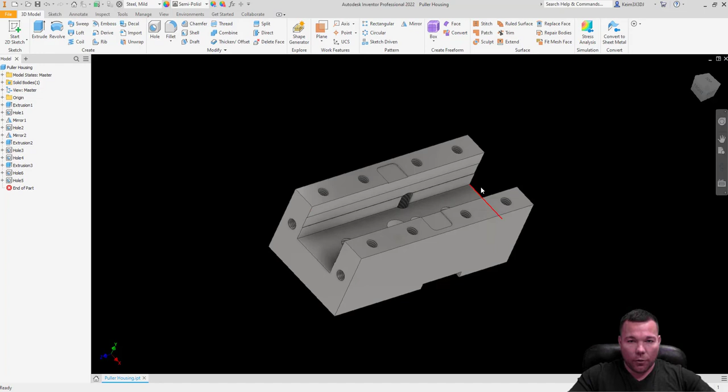But we're going to program this part here. Essentially what this is, it's a bar puller housing. Kind of give you a better idea, I actually have the solid here, so take a look at the solid. Essentially what we have is just basically a channel we're going to be making. We do have some slots down along the side, very shallow, just for some grease. Some tapped holes all around it, a little recess for a spring, some spring steel there.

Okay, so let's look at how we're going to process this part. That's the first step. Anytime you're programming something in 5-axis, you want to decide how you're going to process it. What's the most efficient way to process this thing? You have to think about the capabilities of the 5-axis, but also some of the drawbacks of the 5-axis. In this case, I think the best way here would be, well, number one, what stock do we have?

So for us, we have a bunch of 1 7/8 by 1 7/8 that was donated, so it makes sense, we're just going to use that stock. It's a little bit of extra material to mill off, but we're not making a ton of these, so we can use that stock. We're probably never going to use it for anything else.

So what it probably makes sense to do is to essentially hold by this face, so I'd be looking down on the part like this from my spindle. If I was viewing this from the point of view of the spindle, I'd be looking down on it. So what I would do is mill around and mill this whole part out, mill all the extra material around the sides of it, mill the slot, tap the holes, and we can actually tilt it in the 5-axis, drill and tap these holes, and essentially we have all 5 sides done, with the exception of only this 6th side, the bottom, where we can mill the extra material off and then finish this side as well.

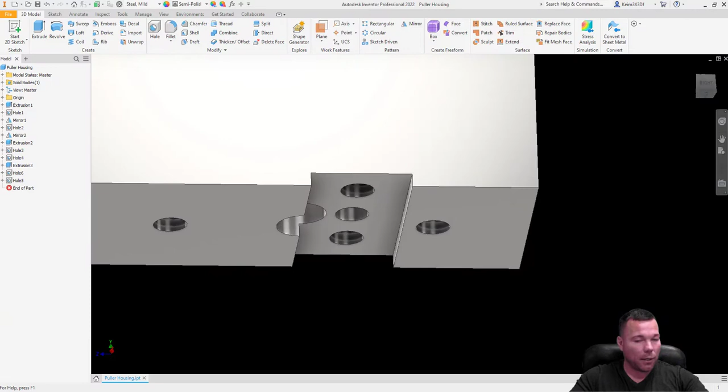Let's bring up MasterCAM. So I do have a solid, and I'm going to be working off of the solid. A lot of times I will work off solids for anything that I do in the 5-axis. Generally, I'm working off a solid. If I need geometry, I'll just create geometry from the solid.

So I'm going to go to Open and go to my computer, and try and find this. I don't have it up. So, Documents, and Bar Puller. I have to change my file type, so I'm just going to pick all files. And Bar Puller, we want the housing. Okay, and right here is my solid file. I just know it's my solid because I know what the icon looks like. The drawing file is actually this one here. So I'm going to pull that in, and of course it's going to bring that back up. Alright, okay, so I have my solid in.

Now the first thing I notice here is that my solid is not oriented correctly. I want that channel there facing up towards the z-axis. So I'm going to need to do a rotate here. I'm going to select this, and select rotate, and of course it's not going to give me the correct orientation.

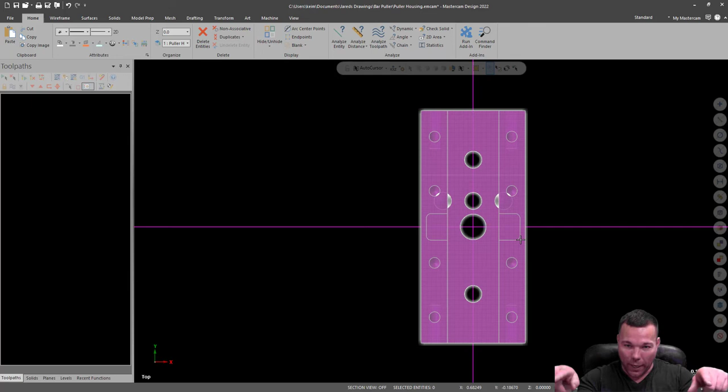Okay, so now if I go to top, alright, so now I'm holding it like this. Well, it's still rotated 90 out. I want it the long way, the long axis of the part to be aligned with the x-axis. So we're going to grab this again, and I'm going to do another rotate. It already knows because last time I did a 90, so I'm going to hit check. Alright, now it is aligned correctly, but I do have one other problem here.

You can clearly see that it is not in the correct spot on the Z. So what I'm going to do is click on this and dynamically translate this. I'm going to turn my 3D mode on down here so that I have all 3 axes. I'm just going to click anywhere, this doesn't really matter. I'm going to click the Z-axis, and align that to 0, or the origin. Alright, so now you can see the top of my part is at 0.

And the next thing I can begin to do is get my machine selected. So if I go to Mill, and I'm going to pick my 5-axis.

Okay, and I'm going to grab my stock, and we're going to set our stock up. So to do this stock, I know that it is going to be 1.875, and the Z is going to be 1.875, and my x-axis, if I look at my drawing here, is 3.375, so I'll probably cut that an extra 1/8 long. So we'll say that's 3.5 inches, 3.5. And I'll go ahead and hit check.

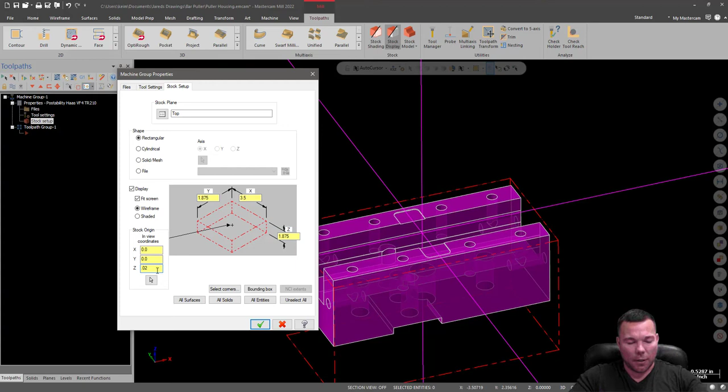So now if I look at this, there, it moved it up from the front. My stock should be slightly above the 0. So that looks good.

Now, to get this right, what I would do is when I touch off my G54 off the top of my stock, once I touch it off and zero it out, I'm going to put an offset of negative 20 in there. And then all my tools will be touched off 20 thousandths below the stock, right where my 0 is in MasterCAM. Your 0 in MasterCAM and your 0 at the machine have to be the same.

So this is G54 right here, or whatever work offset I decide to use. That has to be in the same spot in the machine as it is in MasterCAM. Okay, so starting out, I'm going to work on the top plane. So I'm going to hit equals, and we're going to go to the top, and we're going to take a face pass here. So I'm not going to select anything because I want it to face the stock.

I'm going to select a tool. Actually, before I do that, I want to turn something off. I'm going to go into Files, Tool Settings, and I'm going to turn off Assign Tool Numbers Sequentially. This is something that I traditionally have on because if I'm working in a VF2 or one of the other mills where we don't have dedicated tool assemblies in MasterCAM, I do generally want it to number my tools 1 through whatever.

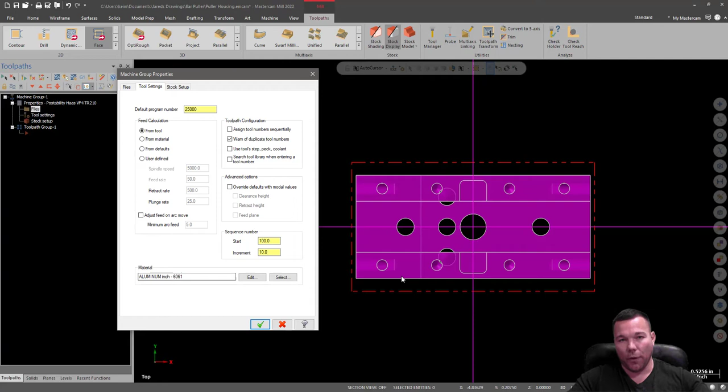But for this, I have set tools in my machine that stay in there pretty much all the time. So I want it to assign those exact numbers. So I'm turning that off. This material doesn't matter. My tools are set. It's set up so that it pulls my tool data right here from tool. So this material means nothing, essentially, for me because I have it set from tool.

Okay, so once this regens, there we go. So I'm going to pick face, and I'm not going to pick anything because I want to face the stock. Plus, I know that my cutter is 2.5 inches wide, so I'm going to be able to face this in one pass. All right, so select tool from library. I have to pull these over constantly because I have multiple screens.

And I'm going to pick my VF4SS tool crib. And I'm also going to open up my assemblies and turn my filter off because I don't have very many in there. And as you can see, I don't actually have my 2.5-inch mill in here. I know where I do have one though. Haas toolbox, and I believe, nope, I don't have it in there either. Okay, so I'm going to have to set one up.

So I'll go back to my other path, and I'm just going to create a tool, and we're going to pick a face mill. Okay. So I know that my face mill is a Haas face mill. So I'm going to go to Haas tooling. I'm actually going to get some of the dimensions for this. I know the cutting diameter is 2.5.

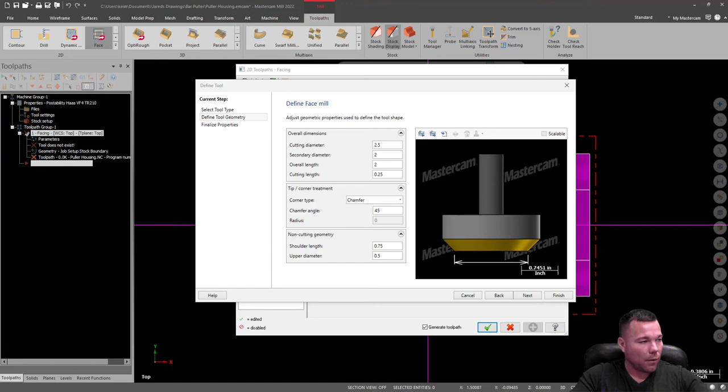And the secondary diameter, I'm going to have to figure that one out. Let's see here. Bring this over. Okay, so we want to do milling. Shell mill bodies. And this is my type, HSNP. I need a 2.5. That's this one. Okay, so the cutting diameter of 2.5, 3.102 is our max diameter, so that's this outside. So we can now set that for our secondary diameter.

So it's 3.1? Yeah, 3.102. All right, overall length. I'm going to take a shot in the dark, 1.75 there. Okay. Cutting length, we have a 0.275. Okay.

All right, and then let's see here, upper diameter. We're essentially going to make that just a little bit smaller. I don't know what that is. It doesn't actually have a dimension on our model here on the Haas website. So I'm just going to say that's 2 inches because it really doesn't matter. I'm not cutting with that, so it's not a big deal.

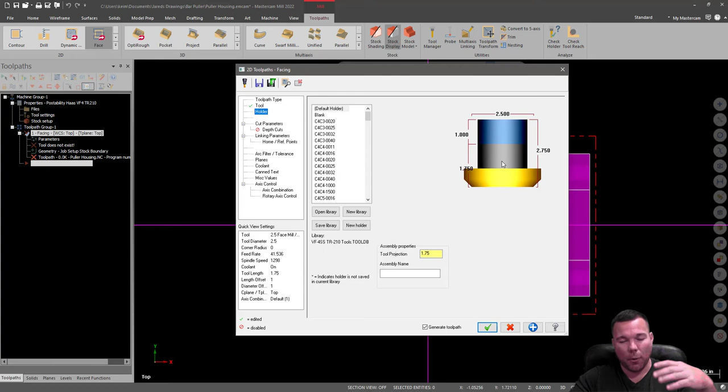Cutting parameters. Now, I'm not going to pay attention much to my holder here because my holder is really not that relevant. Basically, because my holder diameter is actually smaller than my maximum cutter diameter. And I don't foresee any issues where I'm going to have any problems. I'm only going to be doing 3+2, and I'm not using this cutter on any other sides. I'm not doing any 5-axis linking. So I'm not going to have to worry about my cutter colliding really here, or my holder colliding. So I'm not going to set that up. I'm going to leave that as it is.

Let's see here. Okay, so we're going to do a one-way pass. Oh, check that. One pass, I mean. And entry approach 50%. That looks good. Depth cuts, we're not going to take depth cuts because we're only taking 20 thou off. Depth is going to be at 0. Top of stock is 20 thousandths above. Feed plane, all this stuff looks good.

Planes are on top. I'm going to make a manual work offset here because with these 5-axis posts, every new plane that you create toolpaths on will create a new fixture offset. So this one would be 54, the next one would be 55. You can override that here by selecting manual and making this a 0. It'll use 54. If I wanted to use 55 for all of them, I would make this a 1, and so on. 56 would be 2. So you want to make sure that you manually override all these work offsets to the same value. That's pretty important.

And it's going to ask you here if you want to update that for all operations on that plane. And the answer is yes, I do. Flood coolant is on, that's good. And it should have created a path for us, and it did. You can see there, if I actually turn off my axes, you can see our toolpath. All right. So that looks good.

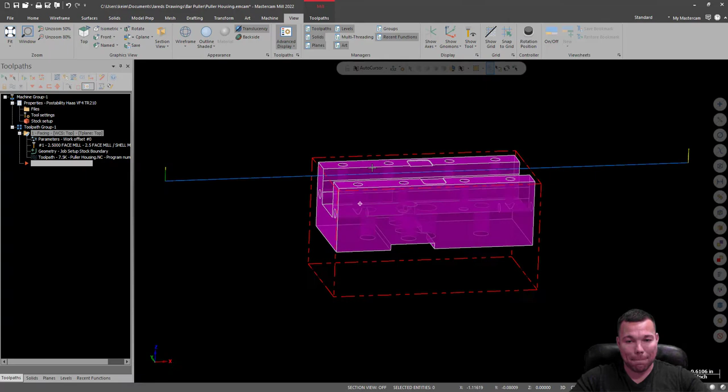That's facing our part. Next thing we're going to do is we're going to want to mill around this part. Now it's 1.5 inches deep. I know that I have 1.5 inches length of cut end mills, so that's what we're going to use to cut around this part. Alrighty, let's go to toolpaths, and we're going to go to, actually, check that, not contour. Nope. We're going to go to dynamic, and we're going to dynamically mill this.

Machining regions, we want to mill our stock away, so we're not going to select a region because it's just going to select the stock as the region in that case. We're going to start from the outside because we're not doing a pocket, we're doing a boss. And the avoidance region, well, that's going to be my part. So this is an interesting problem here. So now I need to essentially create an avoidance region all around this part. So let's say I create multiple regions here, and let's give that a shot and see what we get. Check. So I selected all the sides.

I'm going to pull a tool from the library. In this case, I want my 1/2 inch end mill steel. I do need to edit this because I know that this tool is only 1.25 inches length of cut, and I want it to be 1.5 inches. Shoulder length, 0.5, we'll make this 625. Okay, that looks good. Finish.

I'm going to adjust the... Okay, so that's actually fine. It's already sticking out enough. So we're good there. It'll actually probably be sticking out further in real life. As long as we're sticking out at least that much, we should be fine. The importance of having this holder is to make sure there's no collisions. I'm only going down 1.5 inches, so I shouldn't have any collisions with this. Once we add our fixture later, that's where you'll kind of see this come into play, this tool holder.

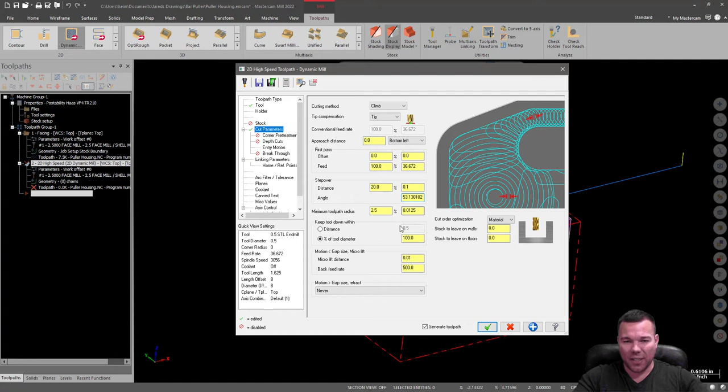Keep that tool down within. Essentially what this is doing is making sure that it's keeping the tool down, and it's going to use a fast feed rate to return to the next cut location, unless it exceeds 100% tool diameter. So in this case, it would be 1/2 inch. I want to increase that. I'm going to make it 2.5 inches by saying 500% of tool diameter.

The back feed rate, we're going to make that 800. Oh, okay, I'm limited here. I'm limited to 500. I have to change that in my machine definition, but we'll forgo that for now. 0.01. I'm going to leave some material on the walls so that we can do a finish pass.

And when avoiding a boundary or exceeding a distance. So this essentially is just this motion. It's going to come up and wrap it over when it exceeds 500% of the cutter, the distance that it has to travel, or if it's avoiding a boundary. So that's what I'm setting there. Corner pre-treatment, I'm not going to use that. We don't need that for us. I'm only taking 100 thousandths passes, so it should be fine taking those corners.

We're going to plunge because we are coming down off of the part into air. And our depth, we know that that is -1.5, and I'm actually going to take that 30 thou deeper. I actually have a little extra on my end mill. I know that I do, so I'm okay going an extra 30 thou there. Top of stock is 0, feed plane 1, we're good. 0.1, I mean, 0.25, that's all good.

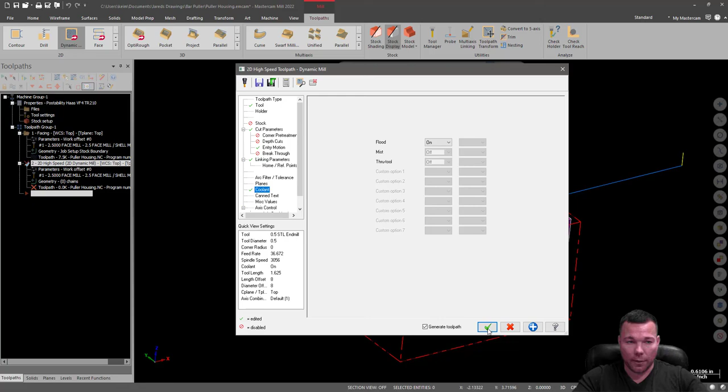And hit check. Okay, so you can see here, it's coming down, it's milling, and you can see my rapid moves so that it repositions itself rather than rapids or fast feed rates all the way around the part. So this is actually a really good example of where you want it to have that exceeding a boundary or a distance. Okay. So that looks pretty good. Next, I am going to do a contour.

All right, so this contour, even though the dynamic mill worked, the contour is going to be problematic. So generally, it does not like when you pick faces like this, and we'll see how this goes. So, I don't think I set these properly. My speed for that end mill is 600 surface footage and 3 thou. I'm going to slow this down for this finish pass to 30 inches a minute. And my plunge rate, I'll make that 40 inches a minute, and rapid retract.

You can see it's a contour 3D is the type. So what it's going to try and do, it's going to try and do this right here. Anywhere there is a gap down there, I want to switch that to 2D, and let's see what happens here. It's not going to like it. Stock to leave on the walls, nothing. Maximum depth variance is fine. Oh, we do want to round the corners, so external corner breaks. Let's put, actually, let's check our...

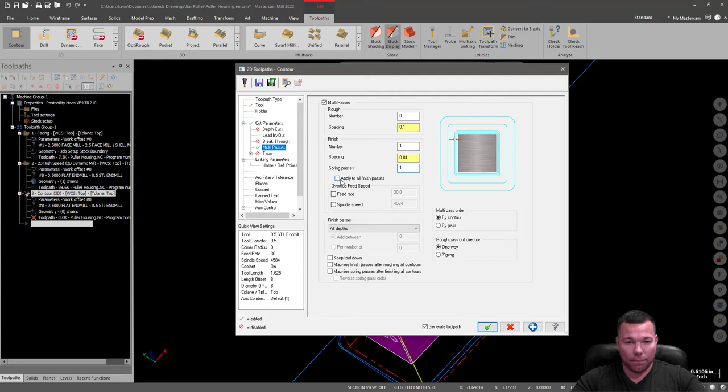Multi-passes, I am going to turn multi-passes on. I'm going to turn rough off. Have one finish pass at 0.01. And I'm going to add a spring pass to make sure that it mills off any extra material that was left on from deflection. And that looks good. Linking is negative 1.53. Top of stock is 0 in this case because we've already milled it off. And coolant is good. Okay.

Okay. So probably shouldn't have went through all those parameters, but I knew that wasn't going to happen because it doesn't know. I just picked a bunch of faces. So I knew that wasn't going to work. So the best thing you can do is we can actually leave this and we can reselect a chain here.

And to reselect that chain, the easiest way to get this is probably just to create a level. And I always create levels for, and I'm going to say top geo, so it's my top geometry. And essentially I'm just going to draw a rectangle from here to here. And hit check.

Oh, it drew at the bottom. Shucks. All right, let's undo that. So sometimes I can't see where I'm snapping to. So it snapped to the bottom rather than the top like I wanted. So to prevent that from happening, what you can do is just turn on your 2D setting, and now it will always draw geometry on 0, basically at your Z0.

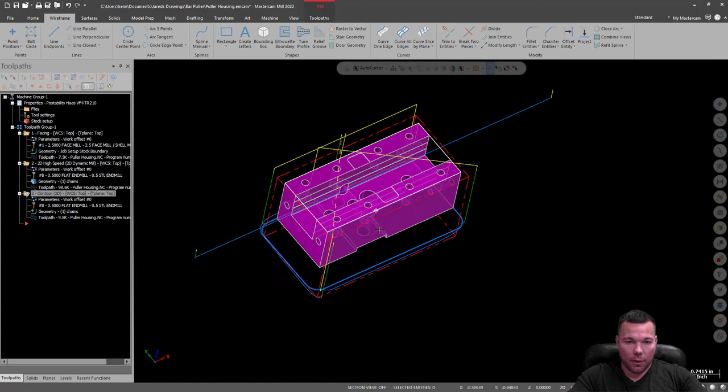And I'm going to go in and make sure that I have my cutter comp off to the left. I do. So everything should be good there. All right, and there it has now redone our contour. Okay, so everything looks good. All right, let's verify that and see how that looks. All right, so that looks good. It is putting a small radius on there, the 20 thou that we asked for.

All right, so I'm going to turn these off. And next, well, I guess we might as well mill out this slot. Now, you might be wondering, okay, well, can we drill and tap these holes first? Well, the answer is yes, we can. But what I'm thinking here is when I go and I remove this material, I'm worried that this is going to move a little bit, which will change the location of my holes if they're drilled prior to that.

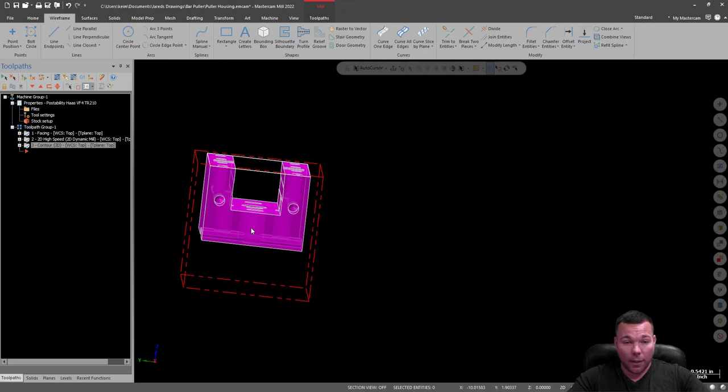This isn't a huge concern of mine. The outside is not a critical dimension whatsoever. It's plus or minus 5 thou, and it could be plus or minus 20 thou. Not a critical dimension. That is one of the advantages of actually engineering the part or creating the part yourself. You can control what is important, and you know what is important and what is not. What is important is the dimension between here. So we are going to peel mill this out.

And these hole dimensions are actually pretty critical too. But the outside dimension, not critical. So if that thing does spring in a little bit, I don't care about the outside dimension. I'm worried about the dimension of that channel, and I'm also worried about the hole dimensions from hole to hole. So I'm going to wait until I mill the channel out to drill those holes so that they are actually on location. That way, if this material relieves itself a little bit, the holes don't move in with it. They'll be drilled in position.

If I did care about the outside, I would actually probably mill and leave maybe 10, 15 thou, maybe even 20 thou on the outside, and I would do my finish pass for that after I took most of the material out of the channel. That way it would relieve itself, and I could, again, make sure that that part was getting milled square. But it doesn't matter in this case, so I'm not going to worry about that.

I'm actually thinking about it, and I'm going to say, well, you know what, let's do it that way. It ain't going to hurt anything. It's not going to cost us any more time. So I am actually going to insert my peel mill before I do that finish contour around the outside. Okay, so toolpaths, let's pick our peel mill here. And again, I may have some issues. Actually, I won't. I could pick these lines here. So basically, I just need a straight line all the way down the part to pick for this peel mill.

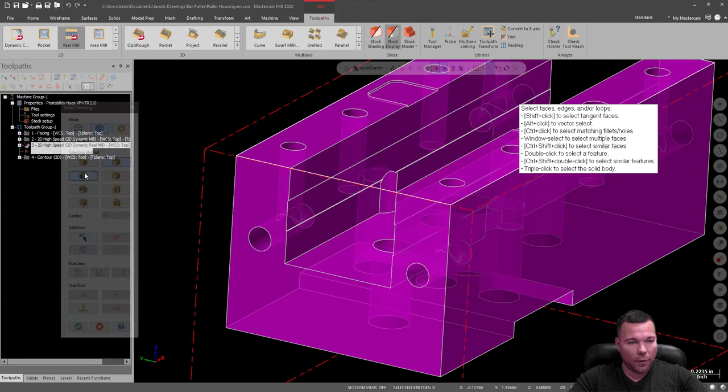So if I select that line, end, and that line. Check. Tool. I'm obviously using the same tool. Again, this is going to be 600 inches a minute. And I do usually have these tools set up for the correct speed, but I'm actually using a different brand tool. I probably should create a new one so that I have it in there.

3000 fine, plunge rate at 40 inches a minute because I'm not coming down into the material. Let's see here. Step over distance, we're going to do 20% again. Climb milling. Toolpath radius is important for this. 500 back feed rate's fine. No material left on the walls.

Additional entry and exit, don't need that. I think everything in there is good. We don't want any depth cuts. We do want some finish passes here, so I'm going to leave 10 on. And then I'm also going to take a spring pass at the end, and I'm going to override the feed rate for that too, to 30 inches a minute. And that should be pretty good. We have our wear on so that we can adjust it if need be.

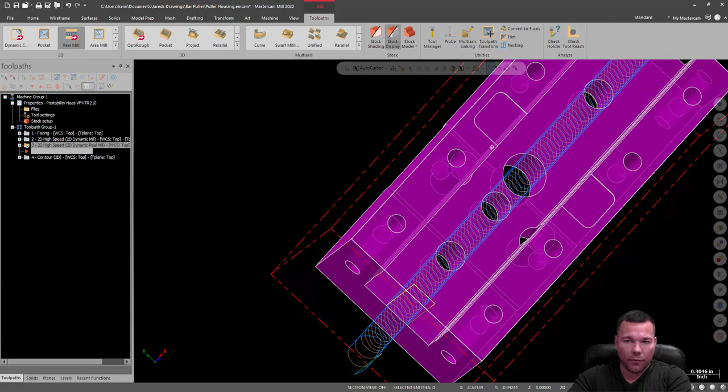One thing I can see here is that it's starting our finish pass right on the edge. So we want to change that a little bit. I'm not real wild about that. We need to put a lead in and lead out on there. And let's regen that.

All right, so that's a little crazy to lead in and lead out there. So let's get back. I didn't actually look at that. 10, 10. All right, let's see what that looks like. Let's preview it. I'm going to use this little button right here to preview what it looks like. Okay, so notice it's leading in. Problem there is that it's still starting right now. I actually want to extend that a little bit.

So what I'm going to do is adjust contour, and I'm going to extend it maybe 0.1. Check. And now you can see that it's starting out a straight line a little bit before. Now, the one thing it doesn't do is, when it shows your lead-in lines, that's part of your lead-in, so that's not going to be in blue, it's going to be in green. The key is just making sure that there's a straight line there as opposed to just an arc that's tangent to that point.

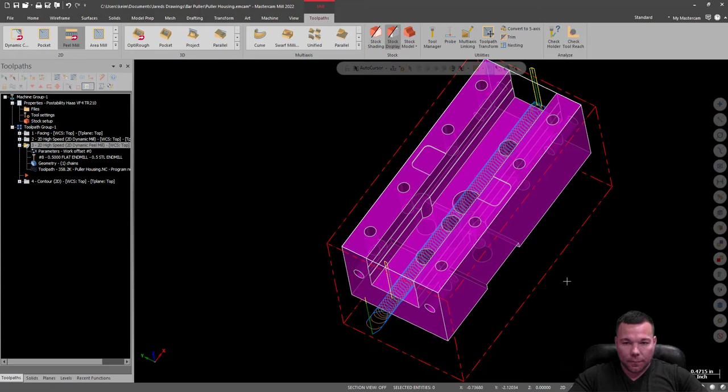And I do want to double check that actually, because I'm not convinced that it is. Ah, it didn't save it. 0.1. That's better. Okay, there we go. Yeah, wasn't quite convinced. Now you can clearly see that it added that extension. All right. So we have that. I'm going to turn that off, and let's see what this looks like when we run it. Okay, everything looks pretty good there.

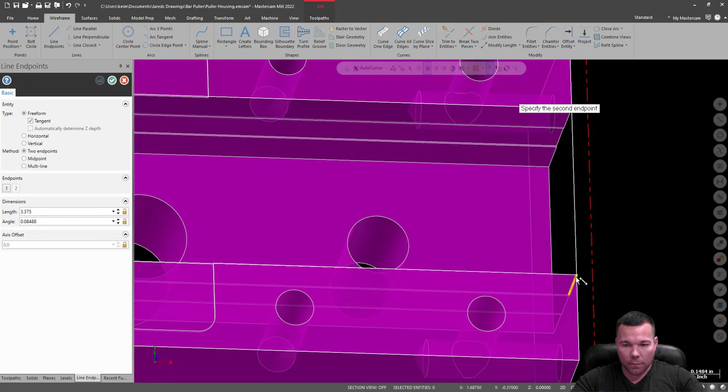Now we do probably want to add a small chamfer to here. So let's go back and add that in. So to do that, we're going to have to create some geometry. So let's go to top, and I think I'm still on top geometry. I am. All right. Oops. Wireframe. And the goal here is just to create geometry so that, that's interesting. That wasn't snapped correctly. All right.

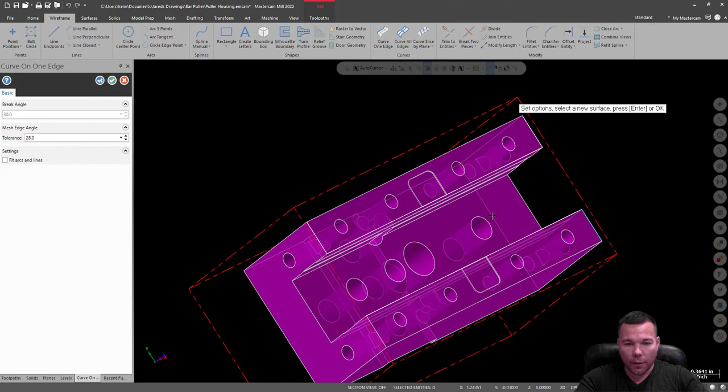I've actually changed my mind here. I'm going to put this on a different one so I don't mess up my... turn that one off. Okay, and I'm just going to turn that into geometry, that, and that. And then we're going to add a chamfer. So I'm just going to make it 0.02, just in keeping with the other radii that we have. All right, check.

Okay, so I'm going to turn this off, and it was supposed to trim that, but for some reason it did not. Yeah, I had trim entities clicked on. Whatever, I can trim them. So this seems a bit tedious, but really the idea here is that you want to make sure this part comes off completely deburred. No reason to spend time deburring something, especially when you're doing it in the 5-axis. It should come off complete, so you don't have to touch it.

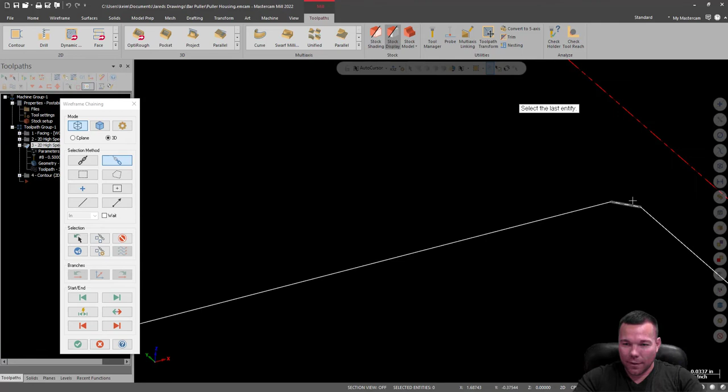Okay, so where am I going here? I lost my train of thought. Yes, I already have this. So go back in. If I can slide over, there we go. Go to my peel mill. Gonna repick, rechain all. And I'm going to pick a partial. Select there. There. There. And, oh, I spazzed out. Clicked the wrong thing. Okay, check. Check.

Let's see if we can regen that. Hopefully that regens. No operations were selected for regen. Okay, there we go. We did regen it. That one, Alt-T. Alright, so there is our path. And now you can see our chamfer has been added there. Okay, so let's see what that looks like when we play it.

Now you can see our chamfer. And there we go. Alright, so that looks pretty good.

Next thing I'm going to do, I might as well stick with the chamfers. So I'm going to come back to my solid and X out of there. We're going to go around all of these profiles on the top. Actually, I rethought that. We're going to wait to do our chamfers, so we can chamfer everything at once. After rethinking about that, it doesn't make sense to do it now.

Next thing I'm going to do is mill these slots out. So we'll dynamically mill those, starting from outside again. Our machining regions are going to be right there and right there. Check. And we have some air regions here. If I select that end and select that end, check.

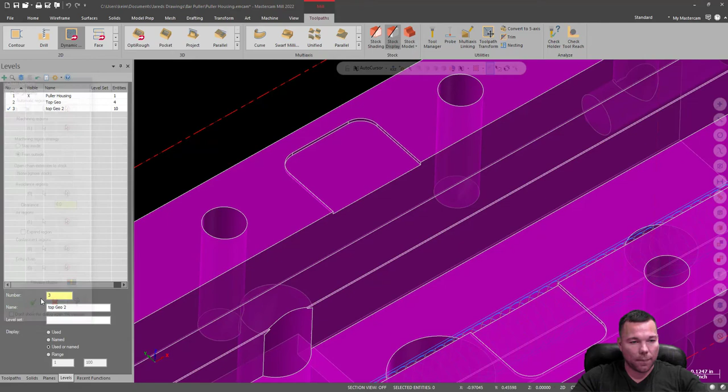Tool. I'm not sure what that radius is in there, so I'm just going to pick a tool and come back and change it if I need to. Hopefully I can get in there with a 1/4 inch end mill. Hoping that's an 1/8 inch radius. But we'll see what happens here.

So all those speeds and feeds are right because they're set up correctly. I know that that's right. Let's see, step over distance. We'll do 25 for this since we're not cutting much material. Stock to leave on walls, 10 thou's fine. All this stuff looks good.

Depth cuts. Depth cuts looks good. We don't want to do anything there. Plunge only. Depth, we're going to select the bottom of that. And top of stock's going to be 0. Planes, everything else looks good.

Alright, so you can see there, it comes in and mills that out. Let's see if I got my end mill right here. Analyze entity. And the radius is 70 thou. Perfect. Oh no, that's actually not perfect. Shoot.

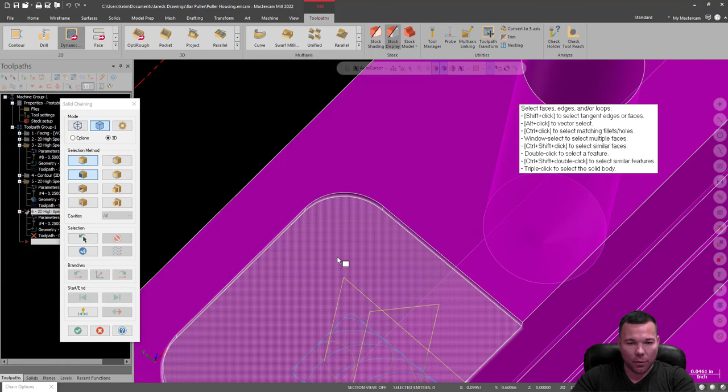So we'll come back in and do a rest mill. Come back into our tool paths, pick another dynamic path, and same thing, same machining region. Oops. Same machining region there. Oh, darn it, unselect. And check. Air read. Oop, not avoidance. Escape out of there. Air regions. Okay.

Alright, so we'll pull up a tool, our 1/8 inch end mill. Everything looks good there. Cut parameters. We want to do a rest material, one other operation, which is going to be this one. Yes. Okay, everything there looks good. It's entry motion. This is 0. Check. Alright, so you can see there it's cleaning out that corner.

And then what I'm going to do is just use my contour to finish that. So I want to make sure that I'm climb milling in this case. We're going to do a partial. Check. 1/8 inch end mill. That plunge rate is way too slow.

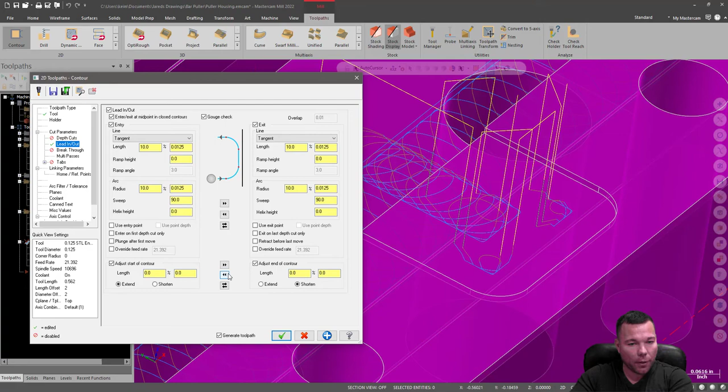Wears on 2D. This here is all pretty good. I just want to make sure that I extend this a little bit, so extend this 0.02. Multi-passes, I'm doing a finish and a spring. That should be fine. I probably could get away without even doing a spring there, but let's leave it in there just in case. 0. And that looks good. Okay, so there we go.

One thing I want to do is go back and look at my dynamic peel. I'm actually going to put a depth cut in here, a finish step of 10 thou, mainly just because I want to hold that depth pretty accurately. I still want a nice finish on that floor. So I decided to change that. So we're going to hit check for that.

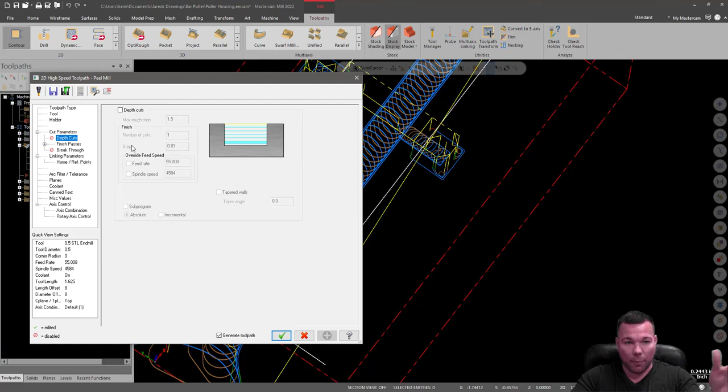Alright, so it added a finish pass at that depth. A lot of times what I'll do there, actually, rather than use that, is create another path, and I think that's what I'm going to do. I don't want to step over 100 thou if I'm only taking 10 thou off the bottom. I want to step over a lot more than that. And I don't have that option to change my step over just for that finish pass. So since I don't have that option, I'm actually going to just create another peel mill pass there.

You know, one of the things you may have noticed is I'm kind of indecisive when I make these videos, and that's because I'm thinking through it in process, right? I don't have this rehearsed or anything like that. I'm thinking through it, seeing what's happening, and thinking, okay, well, I don't quite like that, you know? So I'm going through it, changing things as I go, which is realistic to what you'll be doing. So that's kind of why I like to do it that way.

So this looks good. All my speeds and feeds are good. One thing I didn't see, that's 40, that's good. This here, the step over, we're going to make this like 75% of cutter. We're only taking 10 thou off the floor, so we're not worried about that.

Finish pass. Let's see here. We do want to take a finish pass here. So that's where we're going to take our finish pass.

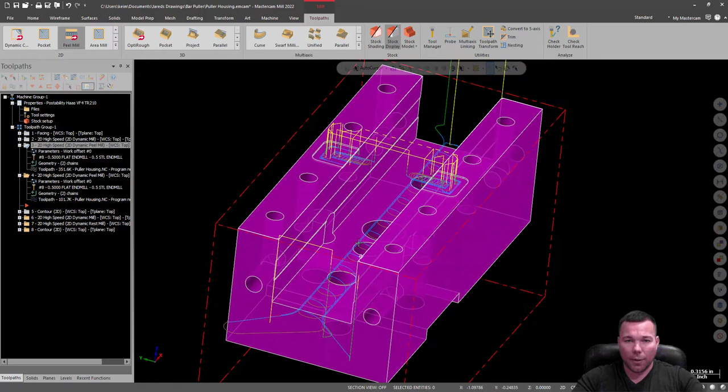Depth. Well, it helps if I have the level on so that I can select that. Okay, 0, and everything else there looks good. I just got to go adjust my other one. Okay, so that looks great. Let me turn this one off. Yeah, so you can see the amount that it steps over. There's much shorter toolpath for sure.

So that looks good. I do want to adjust this. I can turn off this finish pass. I don't need that anymore because I'm doing it in the last one. And I also need to leave some material on the walls, 0.01, and I need to leave some on the floors, 0.01, for that next operation to take off. Okay, so I think we're good now. I think I can live with that.

So let's take a look and see what we got here. That looks a little interesting.

I wonder if that's just graphics. It appears to be just graphics. The way I can tell is I can see my toolpath here. My toolpath looks straight, so I don't see any issues there. That's something I'll keep an eye on when the first part comes off, though. I'll make a mental note that something like that didn't quite look right in graphics, so it's one of the first things I'll look at when that first part comes off. I'll double check and see if that looks like it's gouging in them corners or not. But I don't think it is. I think that's just a graphics issue.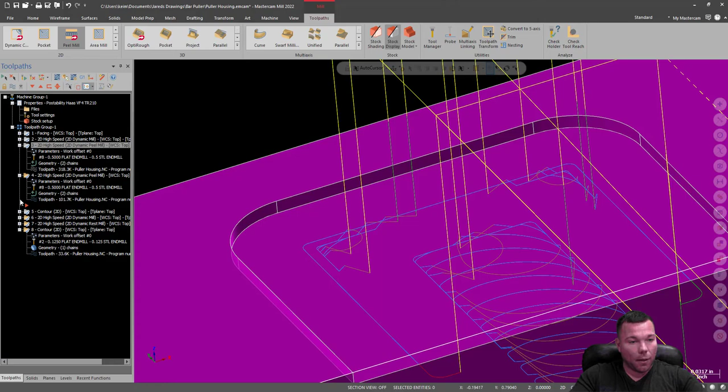Okay, so let me turn all of these off so they're not in my way. All right, so we have a couple more things we can do on this face. We can drill these holes. Again, I'm going to wait till last to do that, or almost last. The other thing that I can do here is put this little slot in.

That little slot is going to be done with a woodruff cutter that I have here. It's telling me that the slot is 200 wide. This woodruff cutter is 3/16. 200 wide plus or minus 64, so it does actually fall within tolerance.

The other thing is I know what this is for. I just arbitrarily drew it to 200 thousandths wide. Probably should have just drew it at 3/16. At the time I wasn't sure what cutter I had, but I figured I had something around 3/16. So I don't really care if it's wider or narrower. It doesn't really matter, it's just for grease to pass through. It's only 10 thousandths deep.

Now, ideally, a woodruff cutter wouldn't be used for this. We would use a T-slot cutter because they have relief on the flutes. But it's not uncommon in industry to use what you have. We do not have a T-slot cutter, we do have a woodruff cutter, and this will work for what we're doing here. Plus, we're not taking it real deep, we're only taking 10 thou, so I'm not really worried about chips binding up. So this will work just fine.

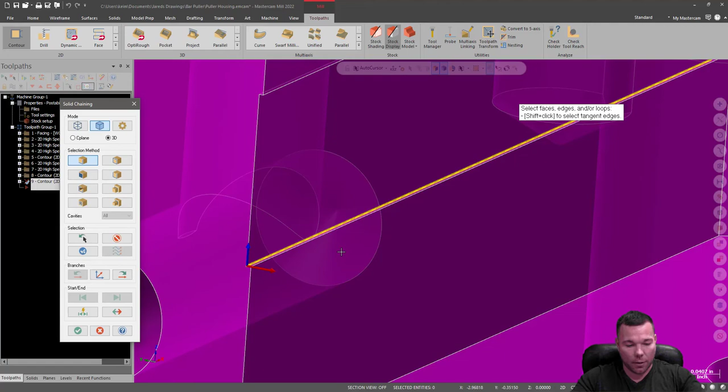And I'm going to select a single... well, actually, I'm going to go into my solids and select a single edge. And I'm going to select this edge. And I do want to think about this, and that actually is the wrong direction, so I want to reverse that. And I'm going to hit end. Okay, so right here I can already see I have a problem because that hole intersects it. I can't pick that whole line. Alright, so that's out, I'm going to pick no there.

Other things I can do: I can draw a line there, which is probably what I'll end up doing. But I could also use this top line as well and just add to my depth. Right? It doesn't really matter what line it is, that's just the path, it doesn't necessarily define my depth. So that's actually what I'm going to do.

Spin this thing around. And I'm going to select this line that is at the correct location. And note that it goes the whole way through. And going to select that line.

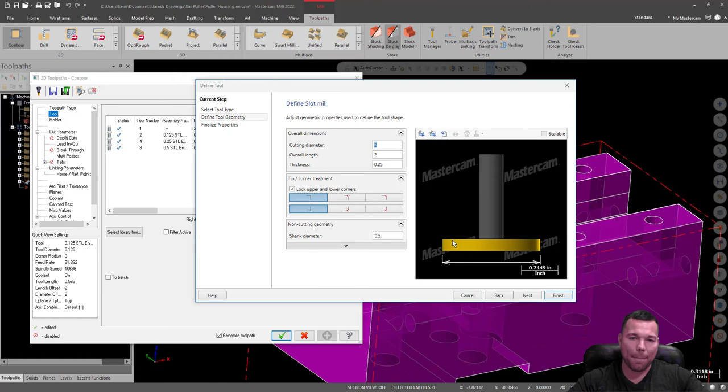Grab my calipers out of the drawer here, and I'm going to measure this diameter of this cutter. It looks like I'm getting about...

0.845, so 0.845 will be our diameter. Our overall length, sure, we'll try and get it as accurate as we can, I guess - 2.2. Thickness, that I know is 0.1875. Upper and lower corners, they are square on this part. Shank diameter - oh, helps if I put the right thickness in. Shank diameter is indeed, I believe, 1/2 inch. It is, okay, so that all looks good.

Shoulder length, there really is no shoulder length here. You can tell there's a little inset because it's a woodruff cutter. It's generally what tells you the depth of how deep to plunge the woodruff cutter in. Doesn't matter - as long as I have my maximum diameter here, I'm not going to exceed that anyway, so I know I'm in good shape. I'm not really worried about the shoulder length either, it's pretty much pointless. I'm going to make it 0.2 just because it bothers me seeing that different color there.

Finish. Okay, so we got our slotting mill, and I'm going to create a holder for this. I'm going to go to Open Library, and I'm going to go to my CAT 40-inch, CT 40-inch, open that up. And these numbers, these 0, 20, that is your collet size - so ER32, or sorry, ER20, ER25, 32. So that looks just like one of our ER32 holders, I believe that's what I'm going to be using. Yeah, I think I'm going to use that.

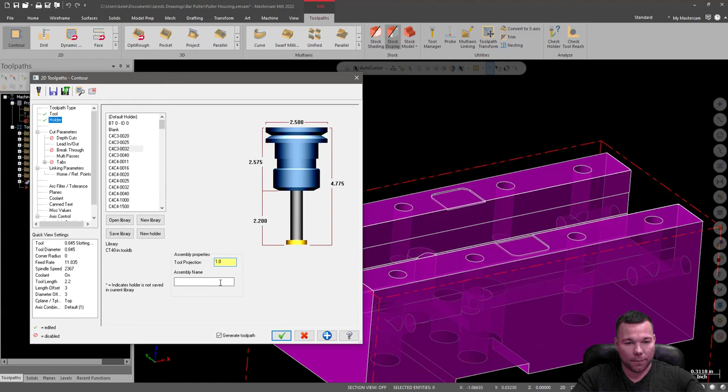So tool projection, we'll say this thing's going to be sticking out maybe 1 inch. That should be fine. If I need to move it up, or move it down, I mean, everything looks good there.

We're going to put wear on. Compensation's off to the left - that's good because we're climb milling. Break external doesn't mean anything here, we don't have any external corners. We do have a lead-in extension, that is just fine.

Breakthrough multi-passes - I am not even going to leave multi-passes on here, I'm going to do one pass. I don't care about the surface finish in this thing, it's not functional other than just to leave space for grease to access the back of it.

Depth - the depth of this is going to be at that location. 0 is my top of stock. And planes, coolant's on. Check.

Okay, so if I hit Alt-T, I should - oh yeah, there they are. So you can just barely see them over this, but that right there is my path. All right, so let's go ahead.

One thing I did notice - oh, so we're gonna have a problem here. One thing I just noticed when I was looking at this is that the start for this side is past the other side, which means that my cutter is wider than my slot, which I didn't notice originally. So that means I'm not going to be able to use this cutter, I'm going to have to find a different cutter.

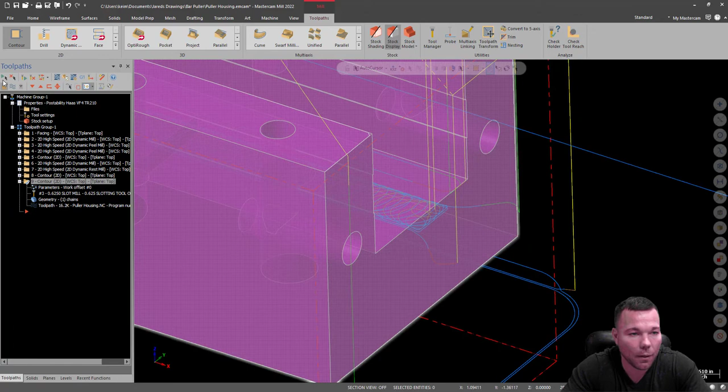Alright, so let's see what it looks like when we play it. See if we get our groove. There we are, so we have our slot groove in there, and that looks good. And by the way, any kind of see like a wave right there along that line, that's just graphics again. I'm not sure why it does that, but it always does that on chamfers.

All right, so let's X out of there. All that stuff looks good. Turn all those tool paths off. Okay, so we have essentially all our milling done from this perspective. The only thing that we do need to drill yet is this - it's the last hole that I'm going to drill from there, or well, I guess it's not the last hole because I got to do these two.

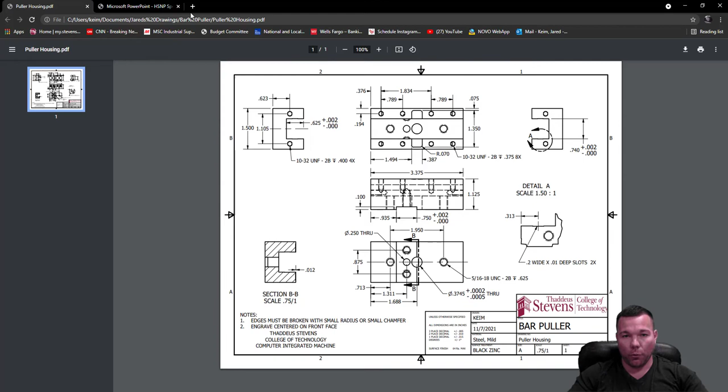All right, so let's drill those holes. Or drill this hole, I should say. So we're going to pick drill, select that hole, check. And I am not sure what size that is. I have to take a look. It is a 3745. Okay, so let's go grab a drill from our library here. And I don't have anything that really works too well. That's really pushing it to run a reamer through, so I need something closer than that. Ideally, I want something that's about a 64th under. It's close to 3/8, so 64th, maybe a little extra would be okay. But essentially, I want to stay around a 64th.

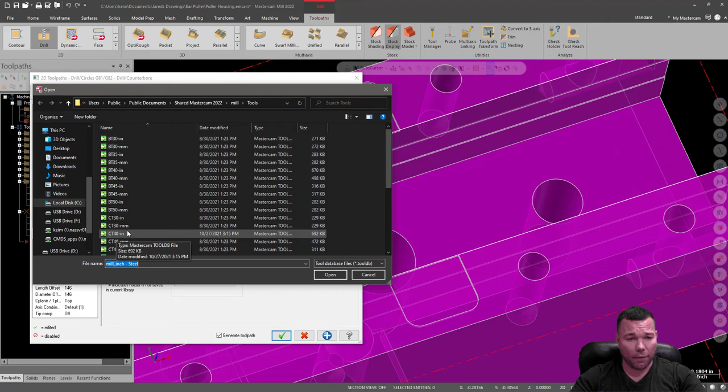So I'm going to come down to my steel inch, and that's going to give me a crazy amount of drills as soon as I get off assemblies. Okay, so there's our 375. Right here is our 2364. So that's what we're going to use. So I'm going to select that 2364, drill that at 5 inches a minute. Speed's right. Holder, let's open up our library here. And again, I'm picking this holder because I don't want collisions. Anytime I do something in the 5-axis, even though I probably would be fine because I'm only using this for that hole that's going to essentially be a 3-axis move. I'm basically milling it like a normal 3-axis part. But just abundance of caution, I like to make sure that it's...

So I'm actually going to edit this tool. Edit tool. Overall length is 3 inches. Cutting length is, let's say 1.5. I'm going to say this is 2. And we're going to say this thing's sticking out, I don't even want to say that much. I'm going to say 1.65. And that looks pretty good. So I'm going to hit finish. And I'm going to have this 1.75. And we are just going to drill this. We're not going to peck drill or anything like that because we're not going that deep. So I'm going to come down. My depth. Zero. And I want tip comp on. Breakthrough amount extra 10. Make that 0.05.

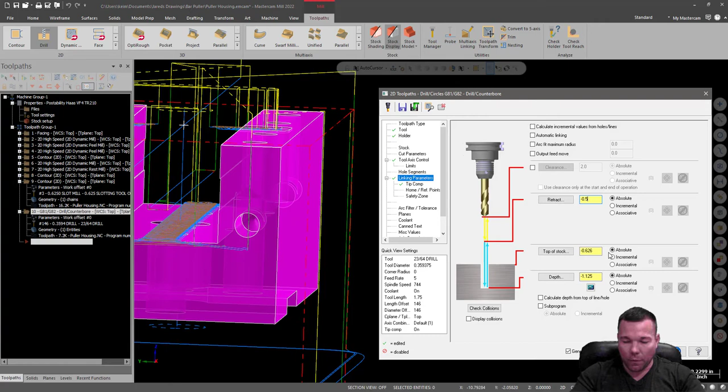Preview that toolpath. Okay, so when you look at this, you can see it's drilling down through. That's good. But if you take a look where it's starting, I don't want to drill a bunch of air. So what I can do to fix that is I can go top of stock and I can choose the hole. And I can also go retract and I can choose the hole as well. And I can just reduce this. Maybe I'll make that negative 0.5 and hit check. Alt-T. One of my big gripes is that sometimes this Alt-T doesn't work as well as I'd like it to.

The other thing I noticed is that I'm way too deep on my... I don't know where I got 1.5 at, but I can adjust that. So I'm not seeing... There we go. All right, so now it's going to start drilling right there. So rapid down to there and then drill. All right, so that looks good. Let me adjust these contours. I got the 1.5 from the wrong dimension. So I want to adjust this. Linking parameters, negative 1 point... in this case, we'll make it 2, because 1.125. Check, and that finish contour, which is right here. Negative 1.2.

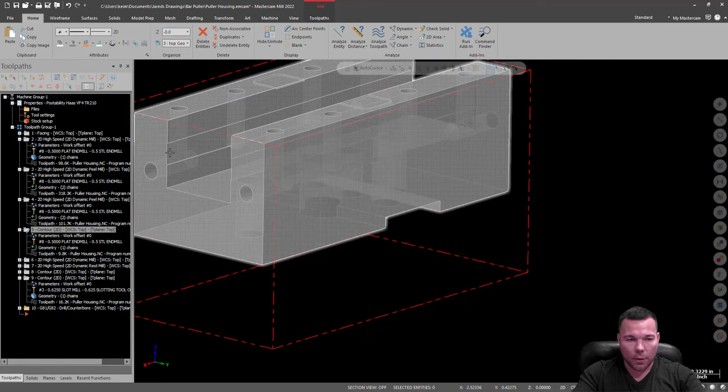All right, so we've got our drill, and I'm using a split point drill, so I'm not going to spot drill that. Next, I'm going to drill this again, and I'm essentially going to do the same thing, only I'm going to use a reamer this time. So I'm going to select and filter. I'm going to pick a reamer, check, and we're going to just pick 3/8 reamer. In reality, it's not going to be a 3/8 reamer.

0.374 reamer. Finish. And the only reason I changed that name is just so I can see that when I print out my tool list. I don't accidentally, even though I should know, it's very easy to make that mistake when you're in the moment and you just grab a tool.

So open library, CT40, and we're going to use our 32. It's definitely going to be sticking out at least 3 inches, but that'll be fine. I'm just going to leave it at that because I'm not worried about that one hitting. Tool, we're going to run this at 35 surface feet, and the feed rate we're going to run at about 12 inches a minute. Okay, so there we go. Remember, half the speed, double the feed. That looks good. That's for a reamer, obviously.

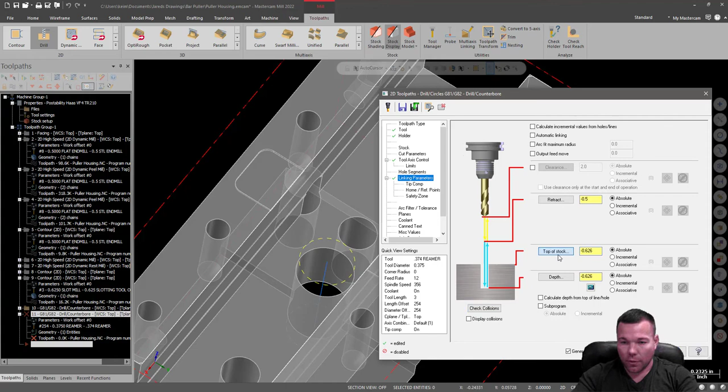This is negative 0.626. Depth, bottom of that hole. Tip comp is on with 50 thousandths of breakthrough. That looks good. Okay, so there we go. Actually, I want to take 0.025 breakthrough. Actually, I'll make it 30. I don't want to hit the bottom of that hole. So I'll hit check. There we go.

Picked the wrong one. Depth. There. Check. There we go. Okay, so that looks pretty good. All right, next thing I'm going to do is the holes. So I'm going to grab those holes. So we'll just start here, and these are getting tapped. So I'm going to select.

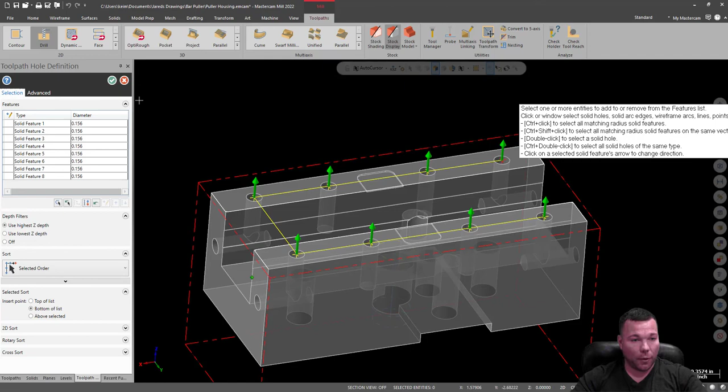So there is a way that I can drill all of these holes all at once, even the ones on the side. I don't like it. Sometimes it works, sometimes it's very finicky. So to use that multi-axis drill path, not a big fan. So I'm going to go ahead and hit check, and I'm just going to create these on different planes, and then I'm going to use my multi-axis linking to link all of those tool paths. That tends to be a little bit more robust and create a better result than what you normally would get with the 5-axis drill.

Tool. Okay, so these are 10-32s. So if I'm not mistaken, I believe that is a number 25 drill. Those drills, number 25. This is assuming that I'm using a cutting tap and I'm not using a thread forming tap, obviously. If I'm using a thread forming tap, it would be a bit different.

Okay, that looks good. And you'll note that I'm not worried about these tool numbers right now. I'll go change those later. Not a big concern. It's just getting the ones right that I know that are in there. I'll change all of the new tools that I've created.

Okay, so this length is definitely a problem. Definitely got to change that up. Overall length of this is going to be about 2.5 inches, maybe. It might only be even 2. Cutting length, we're going to say it's 1.0, and we're going to say 1.5 is the shoulder length. And then finish. And actually, that's too much as well. I changed my mind on that. Finish. All right.

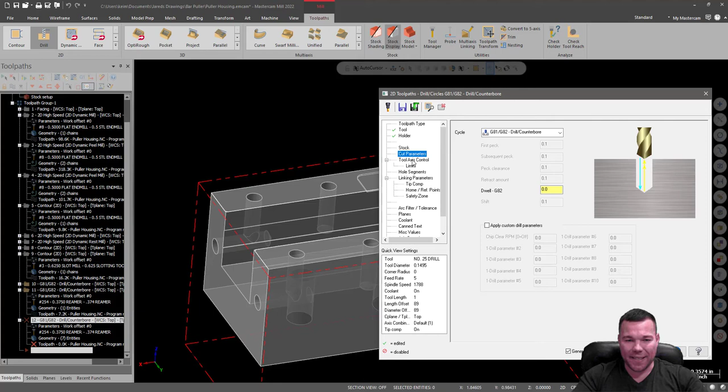And open library. For this one, I'm going to use CT40, but I'm going to use a 16 here. So I'm going to use one of my smaller collet holders. And actually, the other thing I'm going to do is use an extended one. So I'm going to use an extended holder. Drilling this, these aren't particularly deep holes. Even though they show it here, we're not going to go that deep. It's not necessary.

Okay, so the depth, we're going to go negative 0.625. And that's from 0. This is going to be 0.25. Tip comp. Everything looks good there. Coolant's on. Check. All right, so let's drill all those holes.

In fact, actually, it's going deeper. I take that back. So they don't go deep at all. Man. All right, let's change that up. Let's go back into linking parameters and make this negative 0.375. And it's about where we want to be. All right. Okay, so I started here, I finished here. Since I'm finished here, I am actually going to go and drill this other side.

Now, this is where we get into the 5-axis part. So up until now, pretty much should have known how to do all this stuff. So what I need to do now is I need to create a plane for this. And I always create my own custom planes, dynamic, and I can really put this anywhere I want on here. I just have to make sure it's oriented correctly.

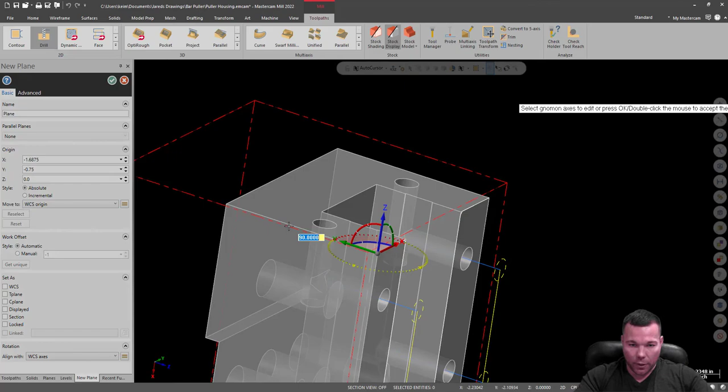So to orient this, I'm first going to select here, -90, and here, in this case, it's going to be 90. Okay, so basically I'm going to be looking at my part like this, and that looks good to me. And this is the right face. And generally I do these all in caps.

That way I can pick them out really easy when I'm looking at this. I can just see the capitals really quick. Okay, so right face. When I program something for 5-axis, the WCS is always on top. So WCS is always set to top.

Depending on what face I'm working on, in this case, before I had my construction and my tool plane on top because I was working on the top plane. I was creating tool paths on the top plane. I'm now going to set those to the right face. Okay, so now it's creating all my tool paths on this plane, but it's referencing my 0, 0 from the top plane. So basically what you need to know is anytime you switch planes or a different face, you're going to leave WCS set to top, and you're going to change your construction tool plane to right face.

And if I want to actually see this plane, I can use this G view, my graphics view, and I can click it in there and it'll put me on the top of that. I don't want that right now though. So I'm going to select these holes. Check. Tool. Same tool. Everything there looks good. Holders, of course, the same. Everything should be pretty much exactly the same, except for the depth, -0.375.

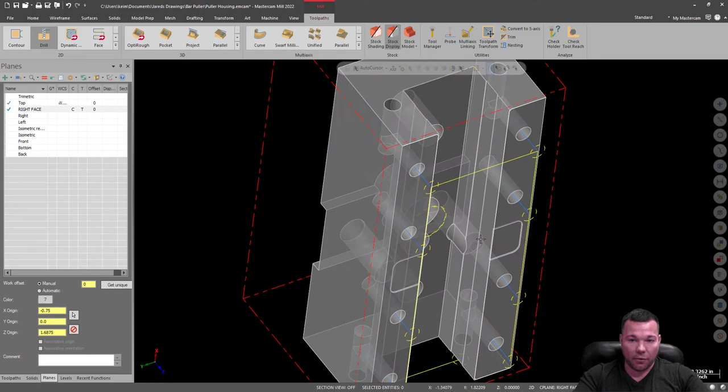Next is the other plane, the left side plane. Is that right? Oh. Hold on a second here. I think I accidentally named the planes wrong. I did. That was my left face. Okay. Edit. Check. All right. New plane. Oops. Dynamic. Okay.

Grab that. 90 degrees. Grab this one. -90. Okay. And that's set correctly. This is going to be right face. Check. Construction tool on that plane. Create my drill. Check it. Tool paths. Looks good. Everything in here should be the same. -0.375. That should be good. Top of stock is going to be 0, and retract is 0.25 absolute.

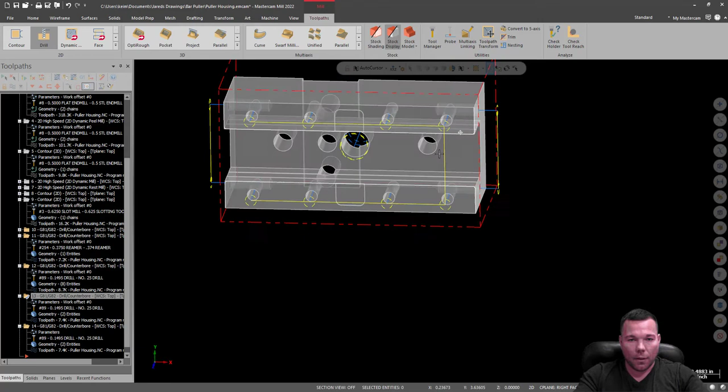All right, now the next thing I want to do here, I'm going to get rid of this, and close these up. These are the three I just created, so these are the three planes. I'm going to select all of those, but before I do that, I'm going to bring in my fixture. So first I'm going to save this thing so I don't lose anything if something were to happen. Bar puller housing, perfect. Save, file, open, computer, browse. Fixtures, Raptor Vice.

So right there is exactly why, because I screwed up and I didn't do it right. What's that? Bar puller. Open that housing again. Okay, file, merge, which is what I should have picked the first time. Drawings, fixtures, Raptor Vice. Okay, we're going to add our vice here. Alright, so I'm going to go from the right side, and we're going to dynamically move this vice. And when I move this vice, I just move it close. I don't really care if it's perfect or not. So that's essentially where we're going to be gripping it. I'm going to hit check, check.

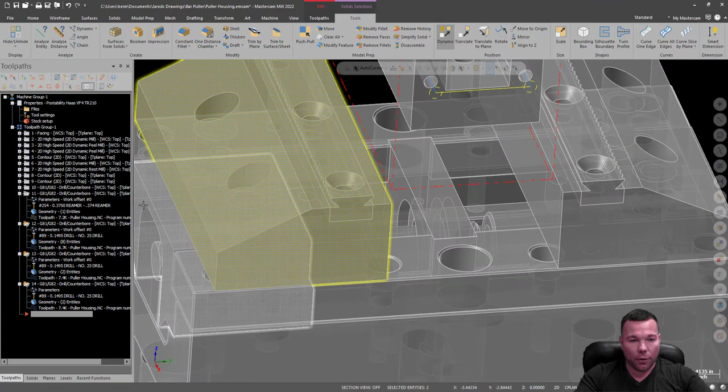And then I'm going to select these jaws here. And I'm going to go back to that right side view, and I'm going to dynamically move those just till that reaches the stock, because that's essentially where it's going to be. And I'm going to hit check. Oh, undo. I almost forgot. I want them to be consistent. Dynamic, front, oh shoot, right. Alright, so there, I generally look at where it's at. So 0.275 is what I'm going to use, 0.275. Check, and then I'm going to select these, and do the same thing, only I'm going to move these negative 0.275.

Negative 0.275. Okay, so now I'm holding on to my stock with my fixture. Alright, the next thing I'm going to do when I simulate this, I want it to show that. I know that when I brought that in, that's going to be on level 21. I brought a bunch of other goofy levels in too. Usually I just go in here and I go clear empty levels, all. And now I have a fixture and the levels that I created.

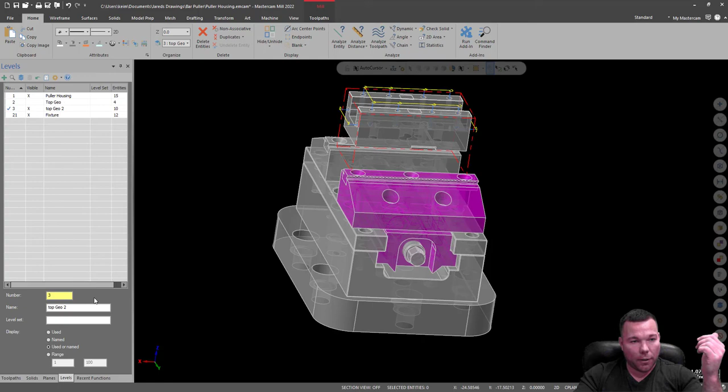Okay, so if I want that to show up, I'm going to go into my settings. Stock is going to be from stock setup. My fixture is going to be from 21. And I'm going to hit check. Now, when I go to my verify, it's going to show my fixture. And now I can see whether I have a collision with my tool holder or anything like that. And I'm nowhere close in this part, so no big deal there.

All right. So the next thing I'm going to do is a multi-axis linking. What's going to happen right now is it's going to drill those holes in the top, and then it's going to retract all the way up to Z0, rotate, come back down, drill the 2 on the one side, retract all the way up, rotate, drill the 2 on the other side. I want it to just stay close to the part.

So what I'm going to do is go to multi-axis linking. I had those 3 selected. You can see here these are all selected, so I don't want all of these. Apparently I had them all selected. I only want these 3 drilling paths. Linked operations must have the same work offset. Oh, okay. I didn't change my work offset for one of these. Didn't override it. There it is. 0. Okay, let's try that again, now that they have the same work offset.

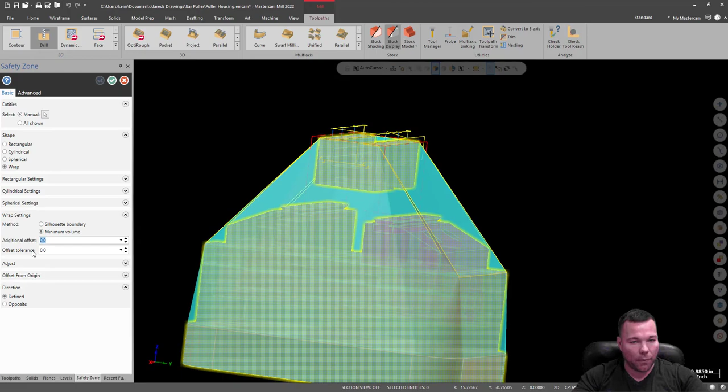Safety zone. Okay, so I'm going to use a feed rate, 500. Define this shape. Basically, I'm going to select all my solids on here. Hit end selection. And this is going to create a safety zone for me. Now, I don't need all this in the safety zone. So I'm going to pick wrap. And then I'm going to tell it minimum volume, and put an additional offset. So basically, it's the minimum volume that you could fit everything in, but I'm going to add maybe 0.1 to that.

It's not updating, but it will. Okay, so there it updated. So now you can see everything's 0.1 bigger than the minimum volume. So I'm going to hit check. Now you can see my path looks like this. It's drilling all these, coming over here, drilling this one, and then it's creating a feed move that comes over to here rather than going up and all the way back down again. This is a fast feed rate, so it's going to move at 500 inches a minute, which really can be 800 inches a minute, and it will be when we're finished with this.

And these operations will automatically be ghosted, and this is the operation that you would view. So this operation here has everything in it now. Okay, so that is done. I believe we finished with this side. So we're going to start with that side when we go to tap it again. I'm going to go ahead and pick drill again. Should be previous, yep. Check, tool, from library, and we're going to pick our taps. Check it, tools, looks good. We want 10-32, check.

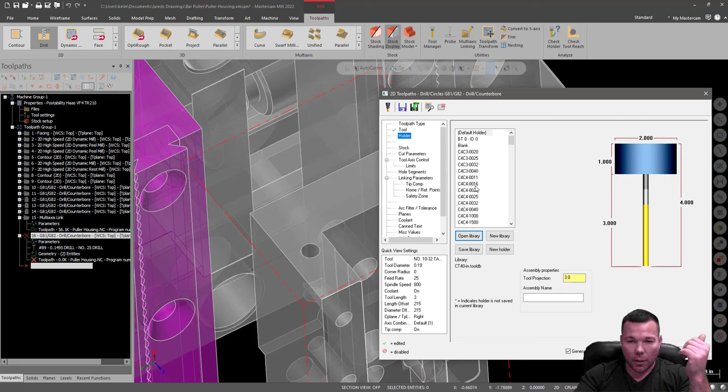All right, spindle speed. I'm going to base it on the feed rate. I'm going to go 25 inches a minute, and it's going to give me an 800 RPM speed. So that should be fine. Holder, open library. We're going to do CAT 40 inch, and one of them extended 16s again. That is way too much stick out for a tap, obviously. So I need to take a look at that tap size. Cutting length definitely is not 2 inches; we'll say 0.75. Shank diameter, I don't care about. Overall length, about 2 inches. Shoulder length, we'll say 0.8. Finish that, and we'll put this up in the holder.

By the way, the reason I change the tools is because the tool projection won't allow me to go any less than, I believe it's the shoulder length. So if my shoulder length is 2 inches, I have to have the tool projection at least 2 inches or more. So that's why I'm going in and changing that. So we'll make this 1.0.

There we go. It's more realistic. Okay, I've changed my operation to tap. I do not want to peck tap, so we're just going to make this 1 inch. That way it's deeper than what my depth is going to be, so I don't have to worry about it trying to peck or anything like that.

Depth, we'll make this negative 0.375. And top of stock is going to be 0. 1/4 inch retract. I could tighten these retracts up; they're actually pretty high above the part. I'm going to turn my tip comp off for this. Now I know I'm going to go exactly to 0.375. That's where the point's going to go to.

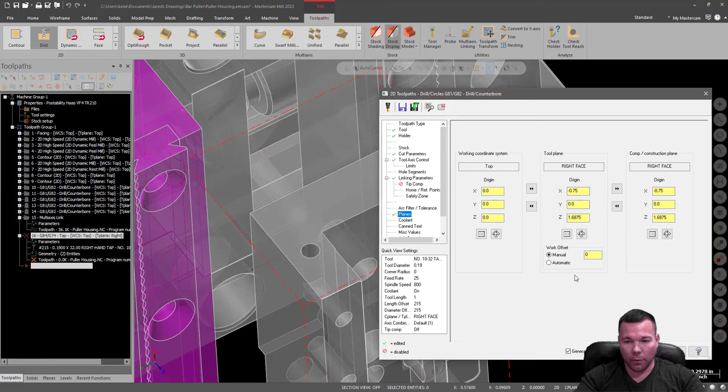I do realize that I picked a cutting tap drill diameter. We obviously would have to change that, but I didn't want to walk through calculating it for this video. So tip comp's off, manual. I think these are supposed to be left, actually. Left face. Wait, is that right? No, right face was it. Check. And oh yeah, there we go. We're already on manual. So we're good. Check. All right, they look good.

Now coming back, I might as well go and do my top holes because that's the more efficient way to make my way back. The only reason I did the top first last time was because I was already on top, so it didn't make sense to orient, reorient, reorient. I only oriented 2 times last time. Okay, so let's change our plane. Let's make sure we're on our top plane. Obviously, you can change that in the toolpath if you forget to change it. I do it all the time. It's kind of frustrating, but...

So again, selection is important. I want to select the actual wall of the part, not the center. There we go. Okay, and then check. Something you may notice there is I did not do that the most efficient way. So let me go back and do that more efficiently so that you can see what I do here. I'm going to start here, go here, here, here. And I could have tried to sort these if I wanted to, which this sorting will allow you to do.

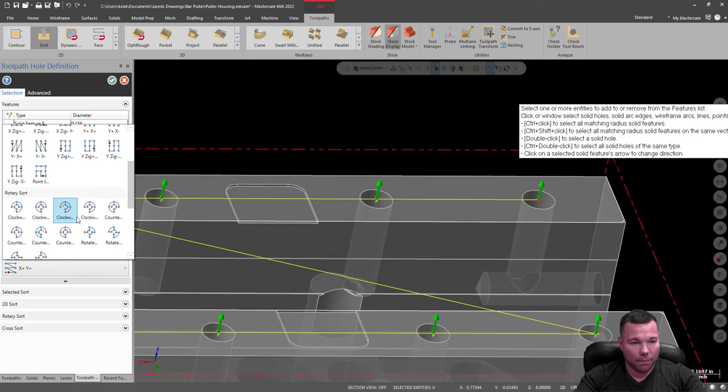Selected, I can do this, where it does that. Basically, I can do anything I really want here. So if I did that, it's basically going to do the same exact thing that I had. So that looks good. That way I've worked my way over to this edge. Now when it rotates, it'll already be pretty close to there.

And we're going to do the tap again. Everything's set correctly there. The holder's good. Cut parameters are good. Anything that should be off here is this stuff. And we're going to go negative 0.375. And that all looks pretty good. Tip comp. Check. Alright, so those look good.

And the last one, we're going to do left side face. Drill. Check it. 0. Depth, negative 0.375. Check it. Okay. All right, so they all look good. One of the last things I'm going to do: select all of these, if I can get them to select. Come on.

And we're going to do a multi-axis linking again. That looks good. Define my shape, again selecting everything. Got my additional offset on there. Check. Check. And you can see there it created my path to do these. And that is extremely efficient. Okay.

All right, so we finished up on this face. The last thing we have to do is chamfer everything. We have to go over everything with a chamfer mill, which is extremely exciting. So let's go ahead and do that. Let me see. I'm going to create chamfer. I'm going to work on that plane there.

All right, so the last plane I ended up on, I believe, was my left side face. Yeah, left face was the last drill that I did. So that's this face right here. That's where I'm going to start chamfering. I'm going to chamfer this hole and this hole with a chamfer mill. I'm using a 1/4 inch chamfer mill, so really I can just drill these, which is the easiest way to do it. So I'm just going to go with a drill, select these again, check.

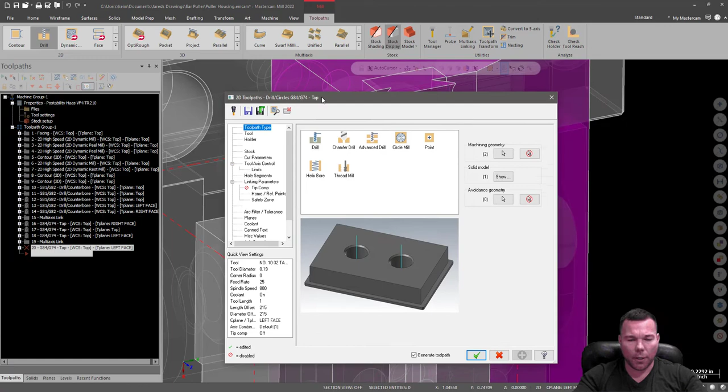Enter, escape. Oh, there we go. Not sure what happened there, I think I might have thrown a menu somewhere and didn't see it. Okay, so we're going to pick our chamfer mill, and I do have an assembly for this in my tools.

Filter active, chamfer mill right there, 1/4 inch. Feed rate 30 inches a minute, surface footage is 500, that's good. 30 inches is a little fast to be drilling these at, so we're just going to change that to a 15.

Holder's all good, and we're just going to do a drill, and I'm going to add a 0.5 dwell there.

Okay, so if we go to 0, we really want to select the diameter that we're going to here. So top of stock is going to be at 0. We'll make this at like 0.05. Actually, make it 0.1. Our depth is going to be important here.

So if I calculate this finished diameter, think about the outside diameter of a 10-32 tap. It should be 187, or basically 190. We want a little bit of chamfer past that, so let's say we want to go to 200. So we'll go to 0.2. Oops, not 0.5, that ain't gonna work.

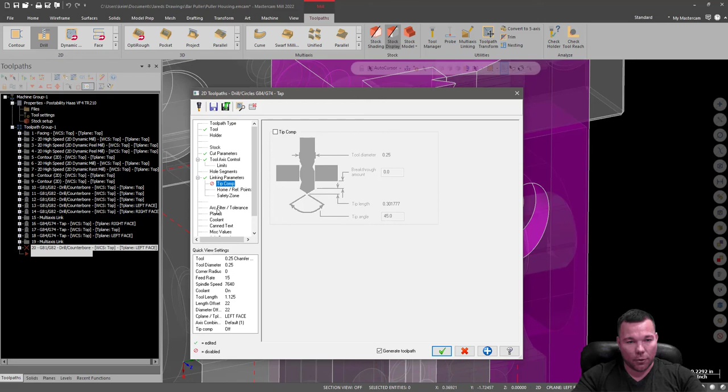We don't need tip comp because we just created the correct depth. Planes, left side face, all that looks good. Coolant is on. All right, so there's that.

Next up, I'm going to do the same thing with all of these holes, and we're going to do some other stuff up here as well when we chamfer. So I'm just going to start out by doing that because we already have our holes and our parameters for the holes correct. All that stuff looks good, just double checking some stuff here.

Linking. Okay, so obviously that depth isn't good. Well, that's because we're on the wrong plane. Linking. 0, 0.1 looks good there.

And again, I'm going to calculate that. Check. All right, and we should be good there. Okay, so we've got that.

The other thing we need to do here is decide whether I want to try and chamfer that or not. I really don't even want to try and chamfer this. There's really just no need to chamfer that. You can pretty much, it's going to be covered up anyway, and I don't think it's going to throw that big of a burr where it's really going to matter.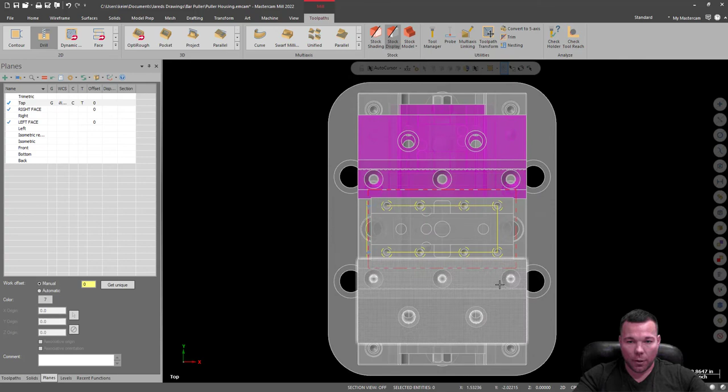So we're just going to chamfer around the outside. We're going to chamfer the bottoms of these. All right, so first thing I'm going to do is I need to get on the right plane because I wasn't. Go to top, I'm in 2D, and I'm going to go to my level where my chamfer is, yeah, okay good.

Wireframe, I'm going to create myself a... it's very difficult to create this one. You have all this stuff. So that looks good. Check it. Turn this off. All right, so there's my chamfers, or where I'm going to put my chamfers anyway.

Tool paths, contour. Just thinking about which way to go here. Oops, unselect. Chain. Check. Tool. Again, we're going to be using a chamfer mill. This is actually correct now. I got 40.0.

Where off to the left, 2D, we want to make it a 2D chamfer. Chamfer width 0.01 - oops, 1. I realized that that's smaller than the radii, they were outside radii. This is just deburring it, so I'm just putting a 10 thou chamfer on there. Bottom offset 0.02.

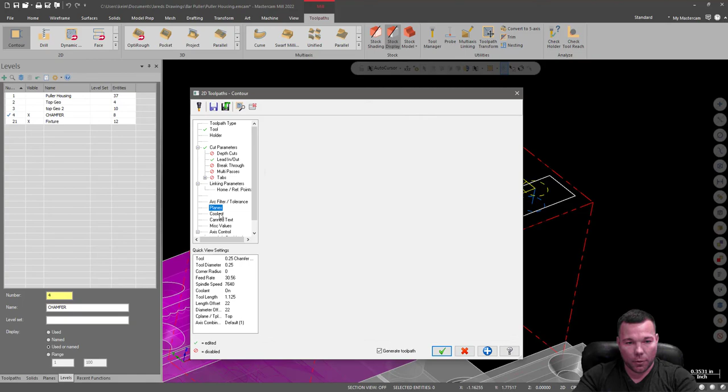Top, coolant's on, hopefully. Yep. Okay, and there are our chamfers. Alright, so they look good. Okay, we're going to get rid of that.

Turn on our puller housing, and the last thing we need to do on this face is a chamfer here. Now I could have did that on the other face, but it might as well just do it all on this face. So I'm going to pick a contour again, and I need this one here. Check. All right, tools correct again.

2D chamfer, this time we're going to use a top offset of 0.002, and chamfer still 10 thou, off to the left, depth cuts no, lead in, lead out.

We are going to turn our lead in, lead out off, we're going to adjust our contour, we're going to shorten this thing. Generally I found about 25% usually is pretty good. We will check that here in a minute.

Negative 625 is right. And this is negative 625 because remember our 0 is the top of the part and our geometry is right here. I could make this 0 and select incremental as well. Either one of those is the same. They're basically the same thing. They are the same thing. Not basically. They are. Okay.

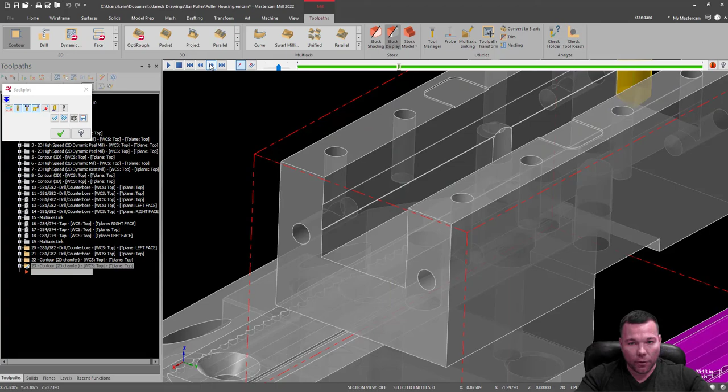Okay, so that looks pretty good. Let's just run that quick in backplot so that I can step forward and see where my tool ends up and if it is colliding. That does not look like it's colliding. So I think we're good there.

All right, so that's acceptable. Everything is done on there. The only thing I could do is add a chamfer to this, but I just don't see a need to do it. If it was pushing up a burr after I run the first part, I might go back and add it. But again, it's being covered up by a plate, so there's not really much of a need to do that.

Okay, so next I am going to do the last side, which is going to be my right side here, I believe. Yep, my right side. So go to my planes, come to my right face, select it, go to my toolpath, and of course we're going to drill these again.

Check that. Tool, chamfer mill still. So I already got my stuff in there. And that's good. Everything looks good here. 0. That's 0. This check. Negative 90. That looks good. Planes, right face, coolant. Okay. All is well.

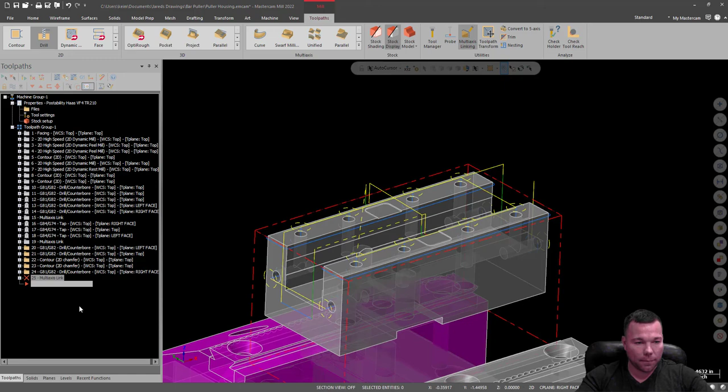Alright, so I think we've got everything there. I think everything is chamfered. I don't know. We'll double check here and see what happens. First, I'm going to select these. I'm going to do a multi-axis linking. Safety zone, define shape. Grab everything. Check it. Check it.

So when I do a multi-axis linking, you've probably noticed that I do it by tool. So I don't have multiple tools for one multi-axis linking path. Basically, if I'm using that chamfer mill, I put all my chamfer mill operations under one multi-axis, and I create it per tool. You can create it for multiple tools, but it doesn't work well. It's kind of goofy, so I don't like to do that.

All right, let's see what we've got. Let's go through our verify first and see what happens. And then we'll pull out our full simulation.

Okay. So first thing I notice is that my dynamic contour, I accidentally put a wrong number in there. And depths, yep, negative 1.2. Check. Select that again. That looks a little better.

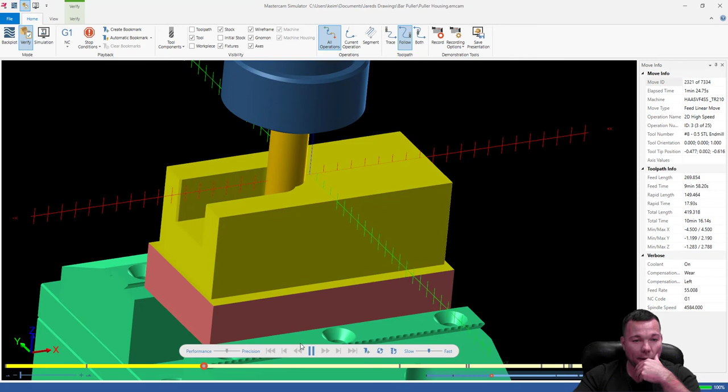Okay, so we got chamfers. I could probably bring them in a little more. I'm not going to worry about it for this demo. We went over that before in class. You can see here we got chamfers on all our holes. Everything there looks good, it's well deburred. Again, the only thing that we really didn't deburr was this here, which I'm not concerned about at the moment.

Okay, so let's simulate this and see what we actually get here. So I'm going to go to Machine, and I'm going to go to Machine Simulation. Actually, first, I'm going to save it, just in case. Save, yes. Now I'm going to go to Machine Simulation, my little arrow down there in the bottom.

I'm going to select my postability fixture. I'm going to set that up from a level. I know it's 21. Stock is going to be from Mastercam stock definition. Post, use external post. We're going to use that in a second here. So I'm going to hit simulate.

And it's going to bring our machine up. Eventually, hopefully our stock and everything else. Okay, didn't put our fixture on, so I'm going to come up here, do show fixture, and there we go. All right, so now we can walk through this, and I'm going to turn it down a little bit and hit play. That was interesting. The face mill didn't show up there. I'll have to take a look at that, see what's up with that. Okay.

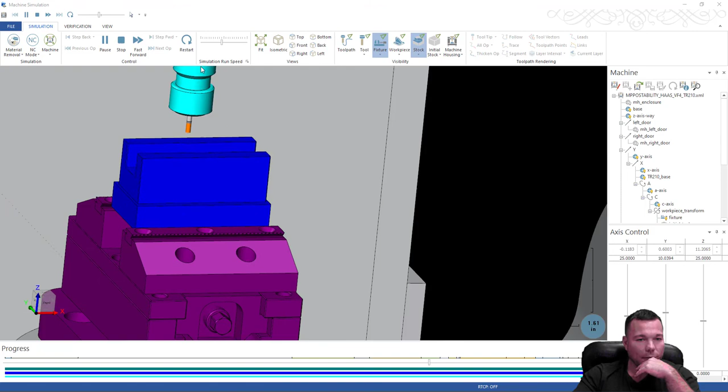So what we're seeing here is it actually simulating what the machine, or what Mastercam thinks the machine is going to do. This does not take into account what our post has written into it. So in order to show exactly what the machine is going to do, or a lot closer at least, we need to turn use external post on. But overall, this looks pretty darn good.

Definitely no complaint here about it. The one thing I do notice is that if you look here, it looks like my tap is hitting the bottom of this hole a little bit. So we do have to watch out for that. Probably want to change that tap depth or drill deeper. So that is certainly a concern, and we would address that.

But let's go back and let's X out of here. And let's go into our simulation again, and let's turn on use external post and hit simulate.

And now it is actually going to post the code. So this reposition feed rate value, I had the post written with a, anytime it repositions, it's doing a reposition feed rate, like when it dynamically mills and it does that back feed rate, that is a reposition feed rate. I'm setting what that value is here. So I'm going to make that 800.

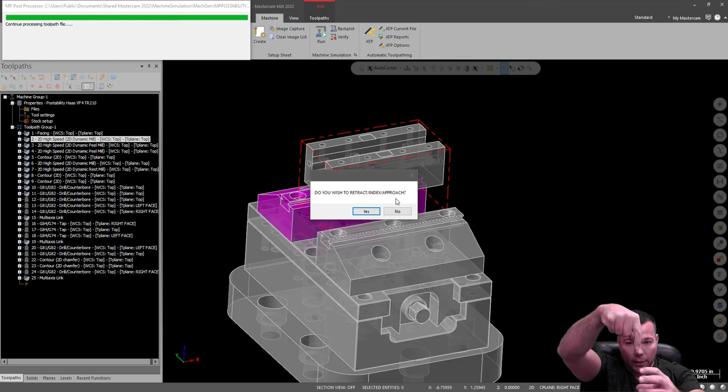And then it's saying, do I wish to retract, index, and then approach? In other words, rather than having the tool here and doing what the multi-axis linking is supposed to do, it's asking do I want to retract all the way up, rotate, and then come down and approach? The answer is no here. I don't want to do that. That's why I put the multi-axis linking in there. If I wanted to do that, I would have never put multi-axis linking in. So the answer is no to that question.

And okay, here's an error: large rotary attribution encountered. Do you want to cancel to exit? No, I'm going to hit OK. OK, no, OK, OK, no. OK, wow, there's a lot of them in here.

So now it should come up, and it's going to use our post. And once again, my fixture's not on. All right, so now since it used the post, notice this, it is actually where it starts at. That's home, machine home, that's where its machine home is. So that's pretty normal. Now I'm going to slow this down a little bit.

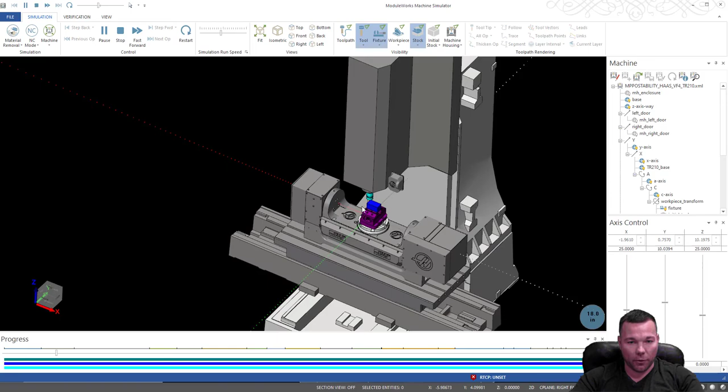Okay, so once again, it's not showing my tool. Oh, that's why, I didn't have tool on. There we go, so now it's going to come home. And it mimics exactly what the code shows. So it's sending my X and Y where it goes to for a tool change, how it always shifts to the back right corner, so that it can avoid smashing a tool during tool change into anything here. Safe tool place, or safe tool change zone. And now it's coming down.

We're milling out here, so let's see what we've got. Did my spring passes. Now it's going to do the finish pass and the spring pass around the outside. See here, it's milling, and you can't really see it right now. The graphics in process aren't that great. Once it finishes, the graphics are actually really good.

Just changing tools, getting that 1/8 inch end mill, finishing that, changing tools again. So let me zoom out here.

Oh, here we go, okay, so it's saying we have a collision here. Do you want to continue? No, I want to see what's going on here. So I'm going to come in and see what's happening. That's interesting, so I think maybe it's just the tip of our drill that's colliding there.

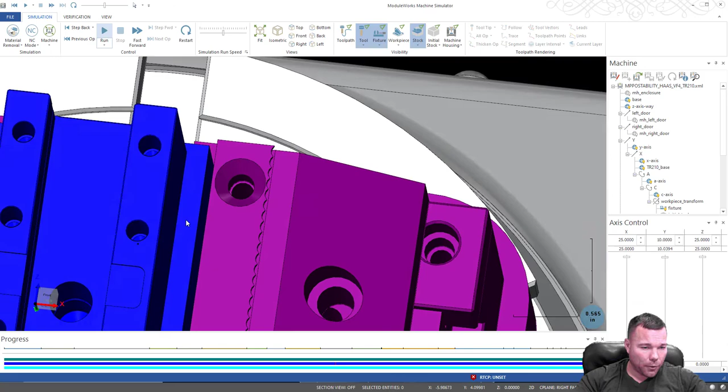Kind of lost my place there. All right, so aside from that drill, everything else looked good. Yeah, everything else looks really good, actually. I can see all my chamfers there, chamfers all look good. Again, my drill depths probably need adjusted. But I would feel good about running this part, with the exception of that drill.

I want to take a look at that drill quick. I'm not exactly sure what the problem was there. I don't even know that there is a problem. So that was the first drill. Where was that at? Right here, I guess. Yeah.

So that's this, and the tool, take a look. Yeah, I'm not sure why it's doing that. So, top of stock is right. Oh, actually, let me make this 0.4. I'm pretty confident that's not the problem, though.

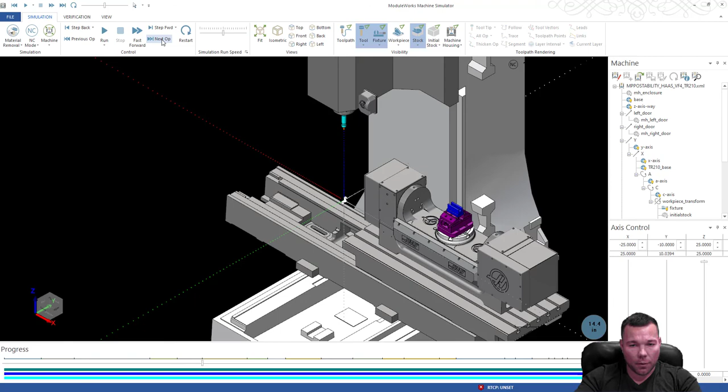All right, so I have no concerns about the first couple. So I'm actually going to go to next op, next op, next op. That's the 1/8 inch. Next op. Next op. There's my drill. Okay, so I'm ready to play this. I'm going to play this slow. Fortunately, it's almost painfully slow until you get to the middle, and then it absolutely flies.

Yeah, so I don't believe that that is actually colliding there. One thing I didn't do is create a tool holder for that. So I don't actually have a tool holder in there. That could be the problem, actually. Holder. And let me just make sure it's G81. Yeah, that's fine. Okay, let me see if that fixes it.

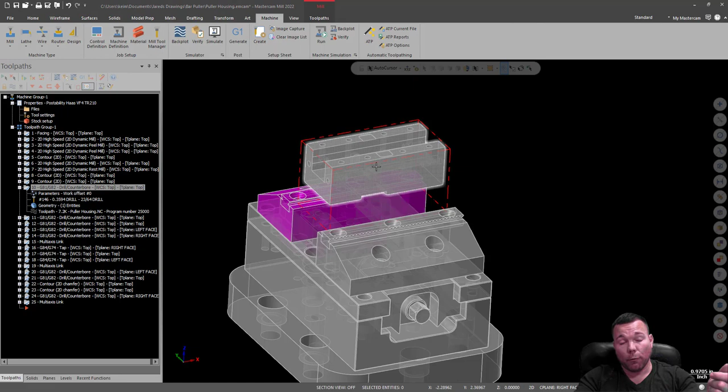Every once in a while you get an error like this, so it's kind of good that this happened. You get an error like this that really doesn't occur in the machine because the kinematics aren't exactly perfect with the simulation, but it gives you a really good idea of whether you're safe or not. And I would be confident enough to run this, and I would just be careful when I got to that drill. I'm going to be careful the whole time I run the first one anyway, because I don't trust anything until I run it out there.

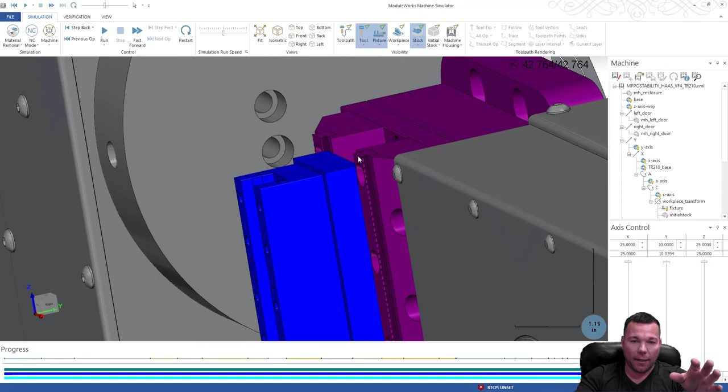So that is now a tool holder. I don't think that that's going to be the difference, but you never know. And that was the difference. Huh. Ain't that something? So there we go, I just learned something there. I didn't realize that that would actually cause that. We're not getting collisions anywhere else. So just as an FYI, when it's running like this is why we make sure we pull the correct tool holder, because you don't want your tool holder to hit here or anywhere. You want to make sure that you have clearance.

So essentially that's it. That is how you program for 5-axis, or at least, I should say, 3+2. If we wanted to do these faces, we would just add another plane, and we would set up the plane the same way we did, oriented correctly. So it would be like this, X, Y, and then Z would be coming up towards you. Actually, you are supposed to engrave Thaddeus Stevens on the front face. So there is some more stuff to do here; this is not completely programmed. You will have to do some stuff on your own when you move forward with creating this part.

Before I go, this simulation will only work on our NetHasp here at the college. So you will have to be here to use the simulation and the post. You should be able to program with a default machine, but you'll have to change that post over once you get here and use the simulation. I should create another video later on about how to upload that stuff and get the simulator working for you.